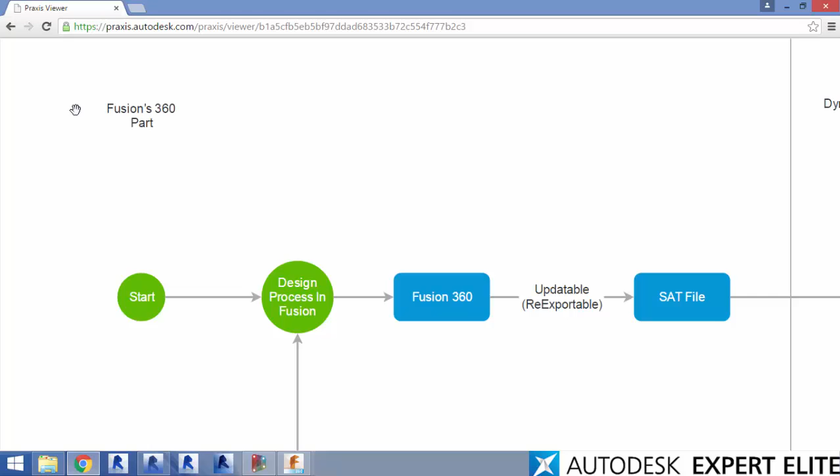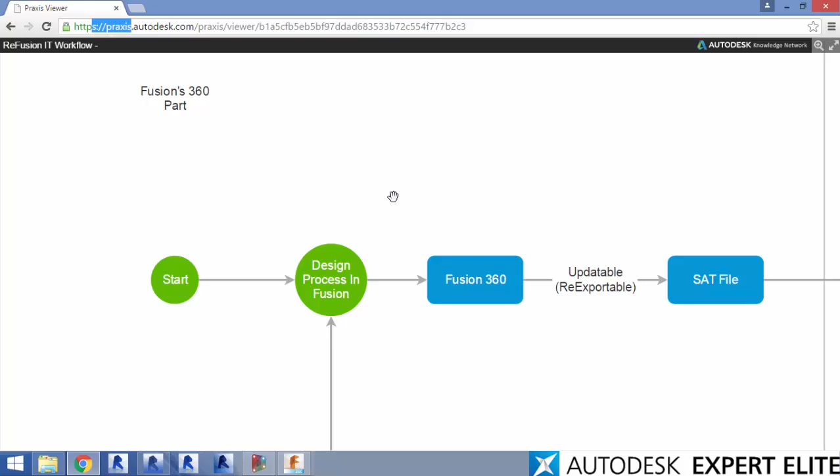Now, let's get started. The workflow is pretty straightforward. It has three parts: Fusion's part, Dynamo's part, and Revit's part. This chart can be seen in the description of this video. It's using Praxis workflow technology by Autodesk, which is still in testing. You can check it out.

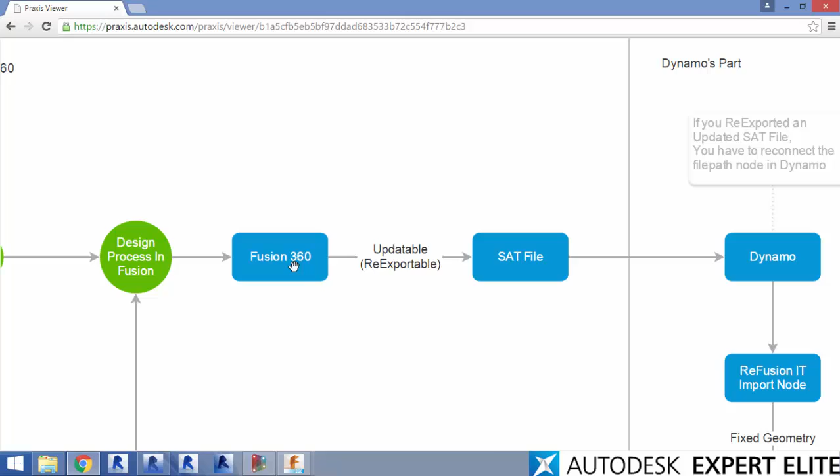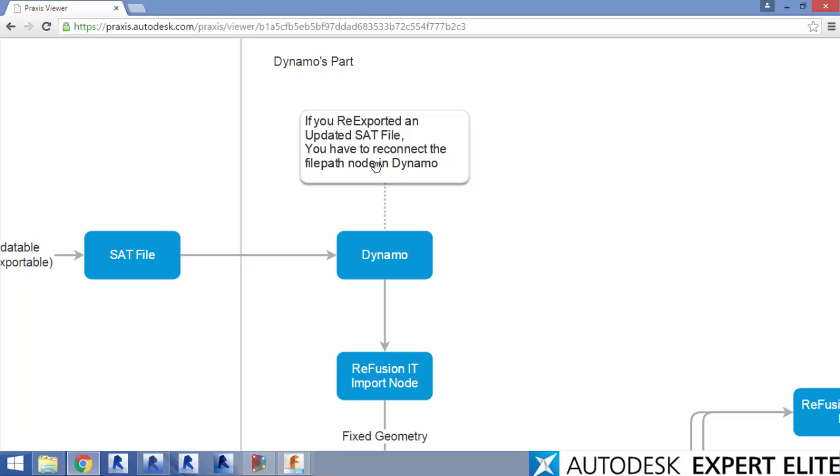The starting point would be the design process, which is happening inside Fusion. Fusion can get me an updatable SAT file, in other words, a re-exportable SAT file. The SAT file gets into Dynamo, where I have placed a little note. If you re-export the updated SAT file, you will have to reconnect the file path node in Dynamo, which I'm going to demonstrate in the video.

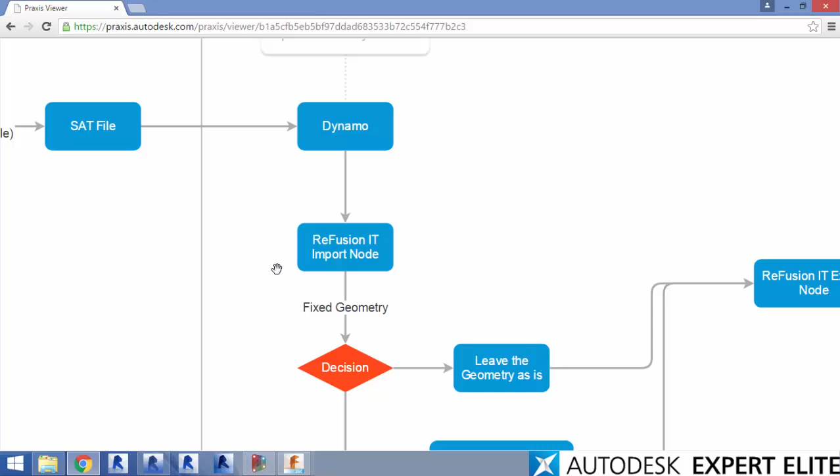Dynamo gets that SAT file into a ReFusion import node, which fixes that SAT file, especially the orientation of the file. After getting a fixed geometry, I will have to decide either leaving that geometry as is or using Dynamo to modify its surface, either dividing it using Voronoi or any other tool.

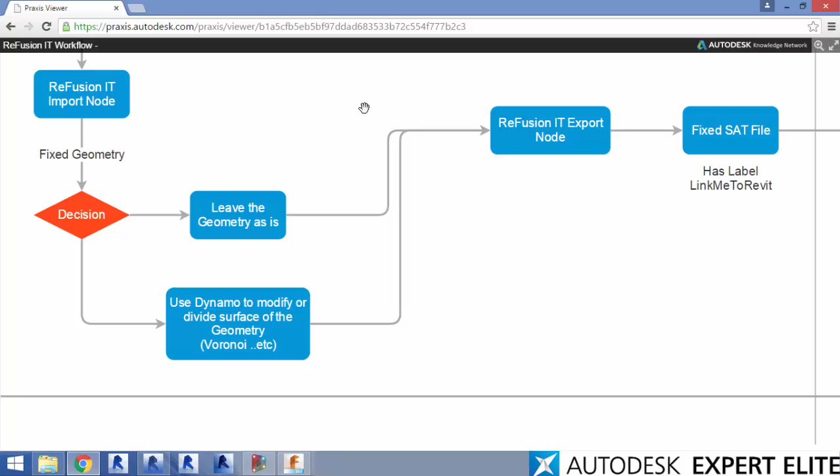Then I get into an export node, and that export node gets me a fixed SAT file which has the label link me to Revit. For example, if my SAT file was named Kuram, then the fixed SAT file would be Kuram link me to Revit. We're gonna see all this in the video.

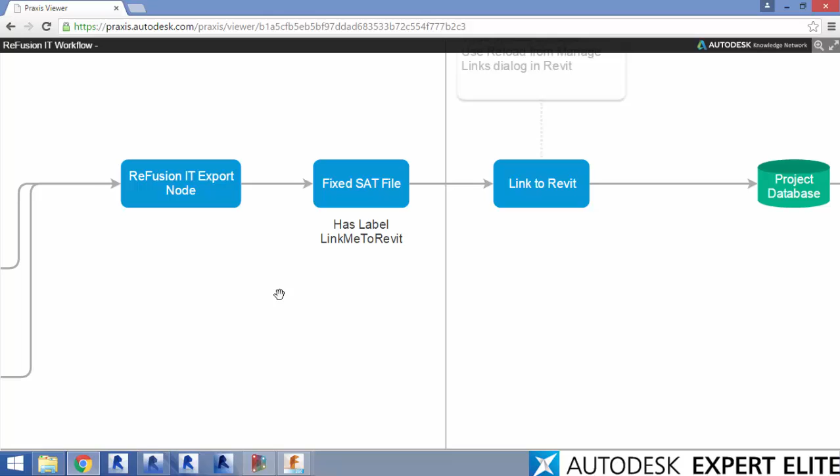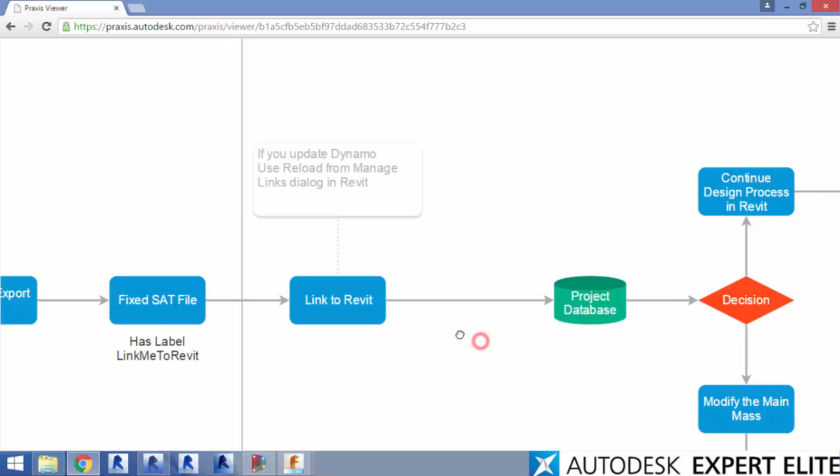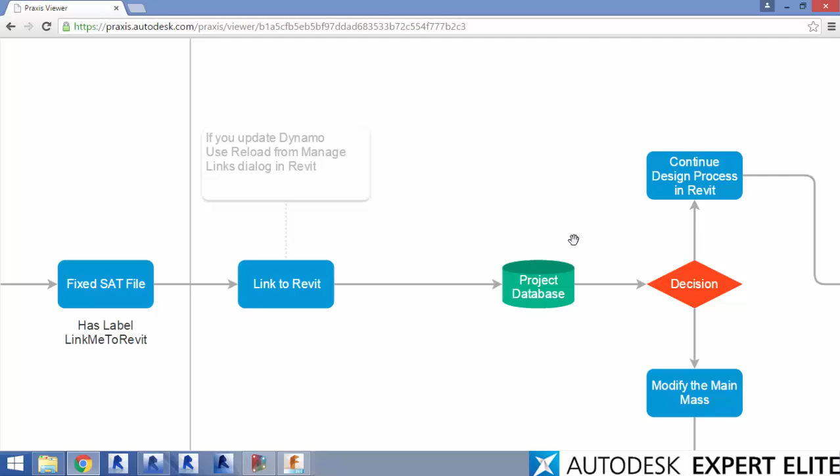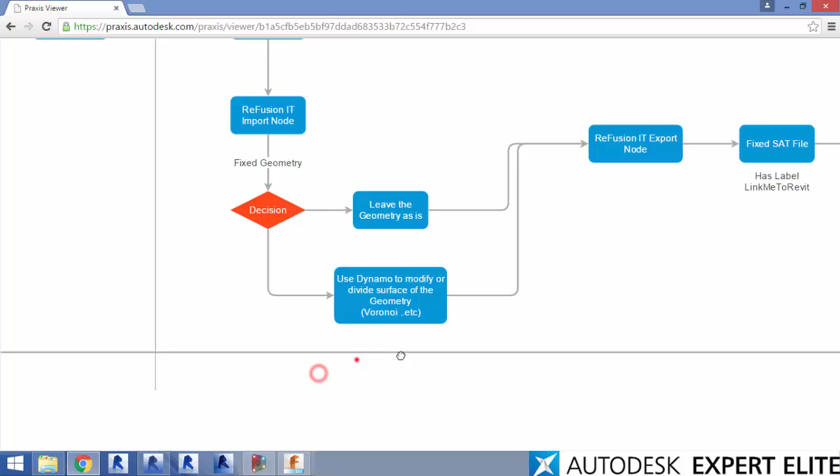The last part would be to get this into Revit, which is linking it into a Revit project. If you updated that Dynamo fixed file, you will have to reload it from the Manage Links dialog in Revit, which we are gonna see. Then I would have to decide whether to continue the design process in Revit or modify the main mass, which will get me back to the first place in the design process, which is pretty easy.

Don't worry, it's not long. I had to make it a little bit long here in order to make you understand it very smoothly. Now we're gonna get into the first part, which is Fusion's part. Here's the Fusion main interface. I'm not gonna get into the details of how to install Fusion, Dynamo, or Revit. They're all available on the web. I'm just gonna explain the workflow, which is connecting those into one piece.

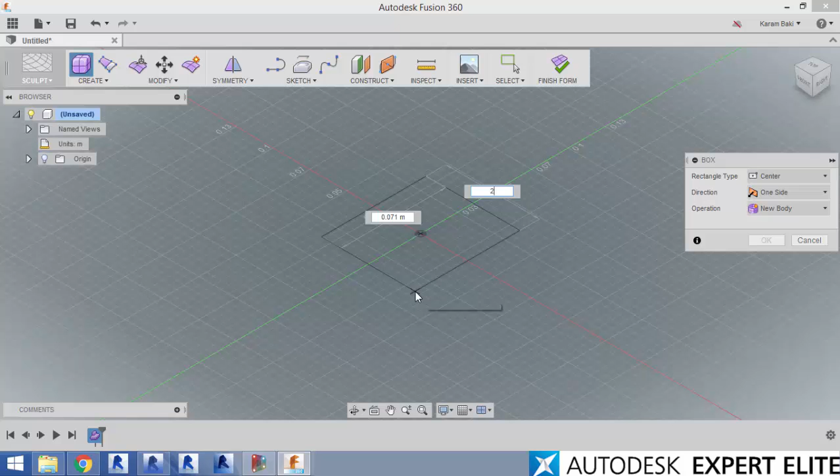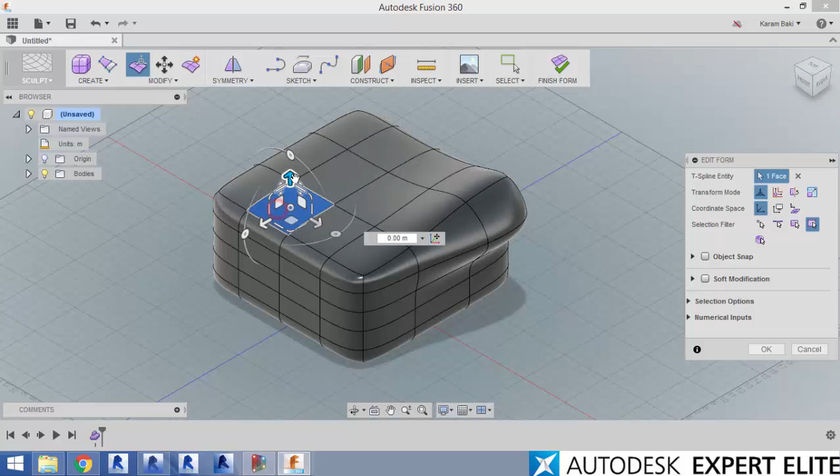For those who have not dealt with Fusion before, I'm going to demonstrate how flexible it is. I've created a quick box which is mirrored and symmetrical in every part. Let me remove the symmetry. Now I'm gonna modify any part I want. I can rotate it, move it up, down, scale it. I can simply do anything I would like to do inside a Fusion project. The possibilities are unlimited and the abilities are huge.

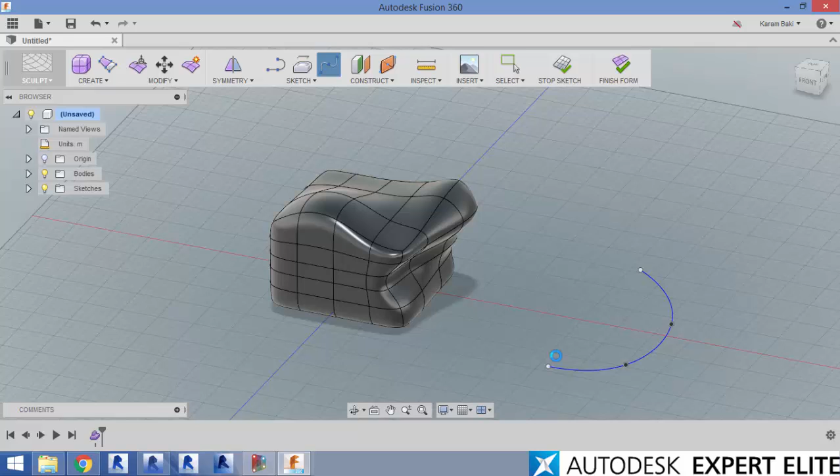Now I'm gonna continue to modify this, just making it a little bit buildable. Now I'm gonna create a sweep, let us say. A sweep is a very well-known form in all programs, but in Fusion it's much greater than in other programs.

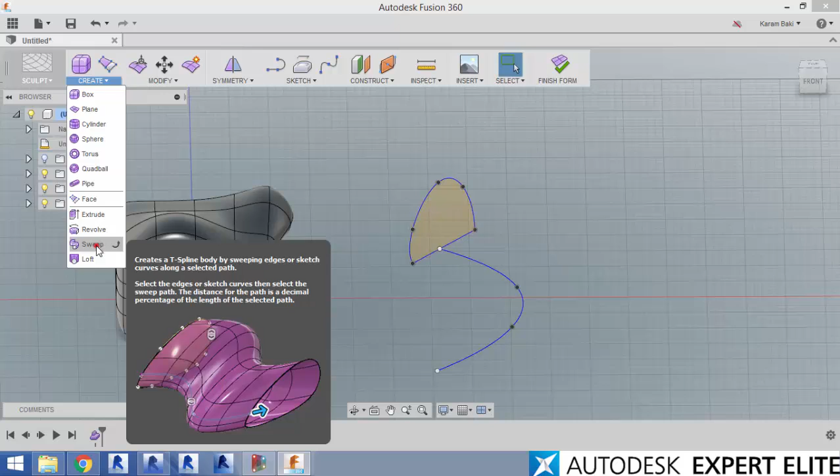Now just a quick splines, which I've made a quick profile in here, and I'm gonna create a quick sweep on this path. Yep, and also this is modifiable in the way I would like it to be modified.

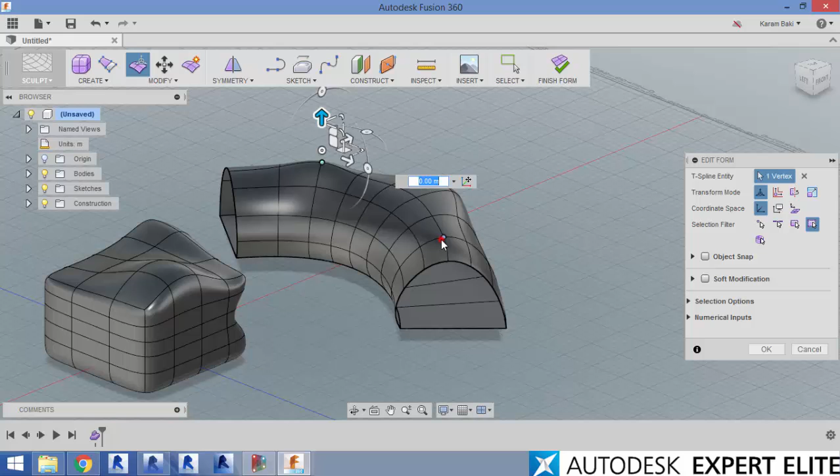It's pretty easy to use, pretty straightforward. It does not need a lot of proficiency. Now filling the holes is also a great feature, just like that.

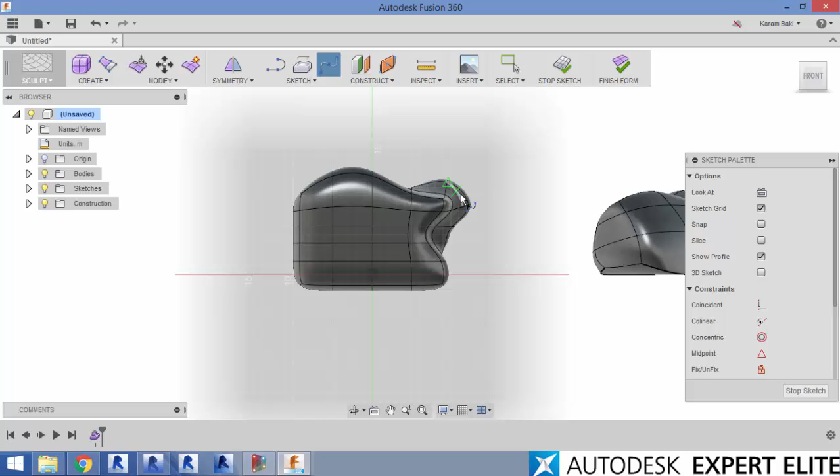Now another great feature would be the bridge connection, which is I'm gonna make a connection from this into this, let us say. Oh, sorry, what was that? I don't want it to be closed.

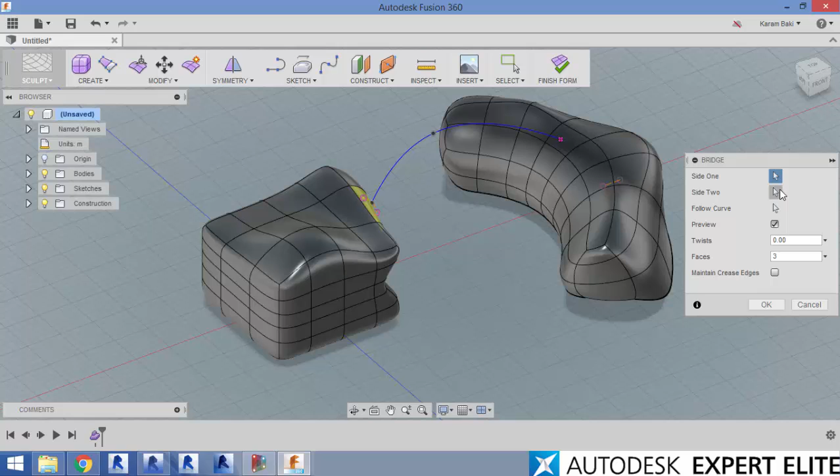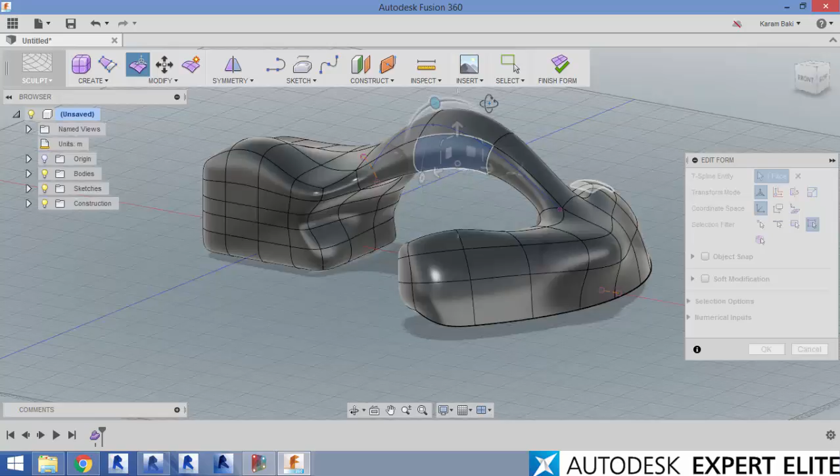Now I'm gonna create a bridge in between this and on that curve. Now check out this great ability. We just connected everything together, and also this is customizable the way you would like it to be customized. That it's all smooth, it's all great, it's all quick flash of ideas that can come inside your head.

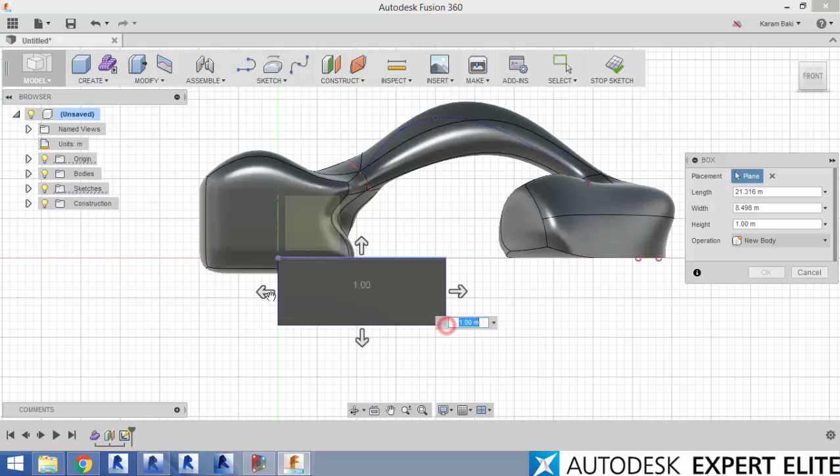Now I would do a last move, which is finishing the form and then creating a quick void, which is gonna be in this place. I'm gonna cut out this part and finish it up.

Now this form has not taken from me 1 or 1.5 minutes. Now how to get this form into Revit and continuing the design process in Revit was the main challenge.

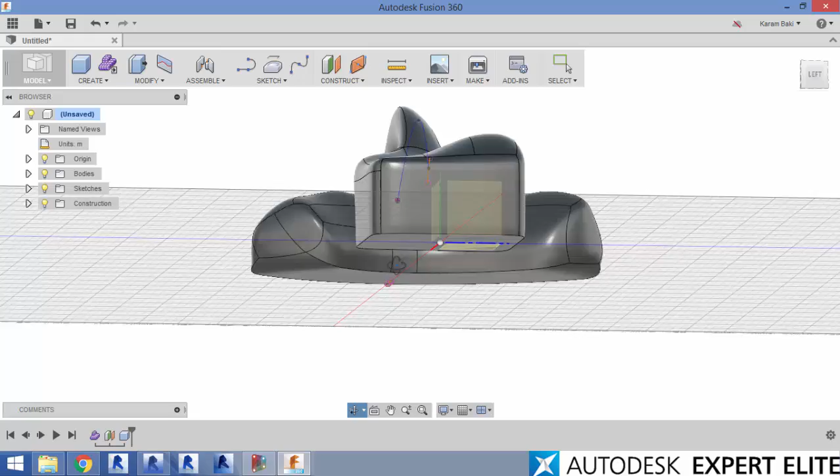The final thing I would like to show you in Fusion before getting it into the next part is that I can get back into time and edit the form the way I would need to, or even more manipulate and make it more advanced, make it more like smoothly fluid and whatsoever.

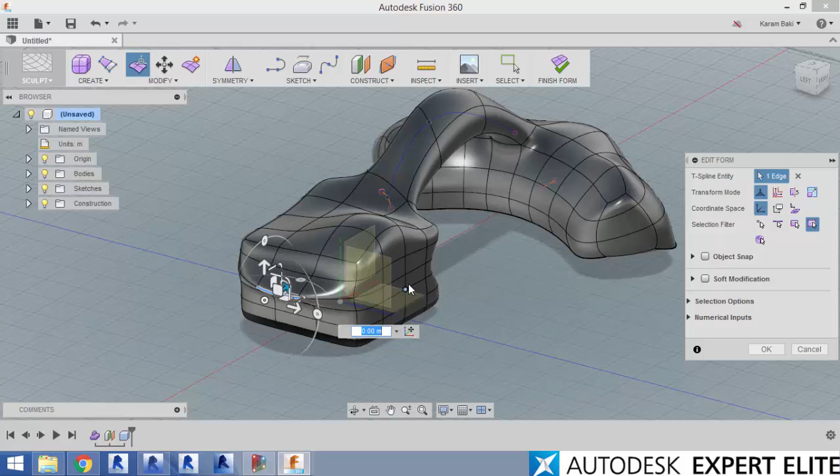Now this is a very quick form. I know it's an ugly one, however it's just for the demonstration, and okay, finishing it, it also recutting itself and fixing itself again. Now I can of course save the project to open it again as a Fusion project.

But now let's get into the next part, which is getting it into Dynamo. Now, I'm gonna go to File, Export, and I'm gonna create a new folder called Test ReFusion.

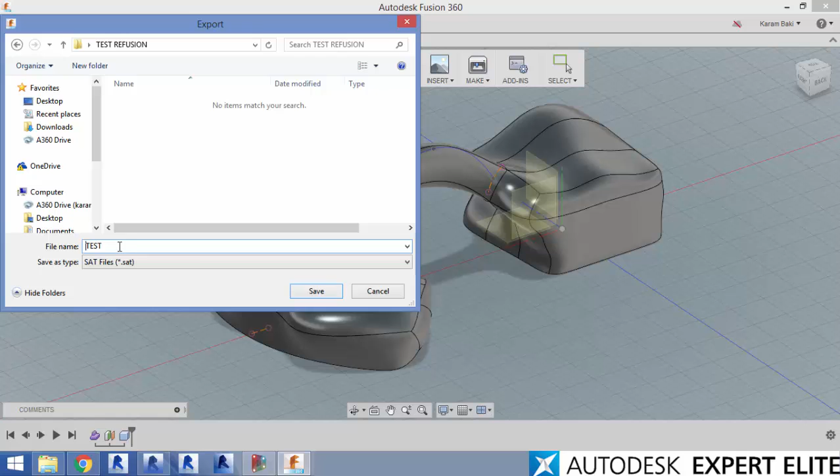Now this is my project, let us call it project test.sat, or just let it test.sat. Okay. Now I'm gonna go to the Explorer. I can see a test.sat file.

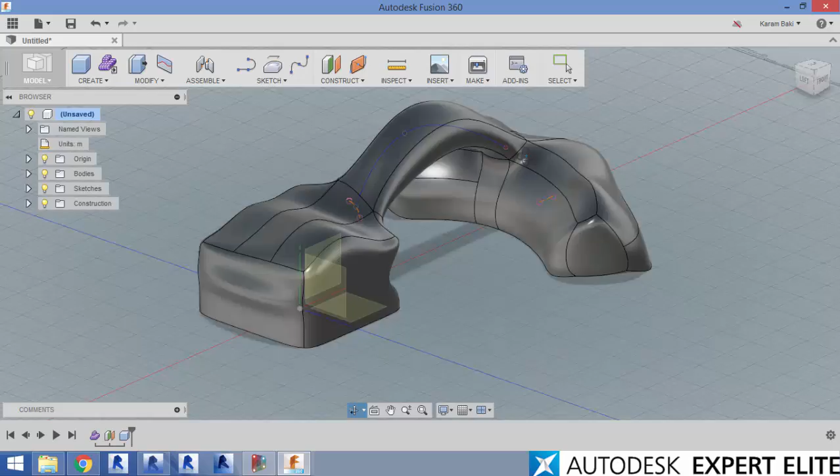Now I'm done with Fusion, and if I needed to even more manipulate the form, I can simply re-export it as many times as I want, but now let's get it to the next part.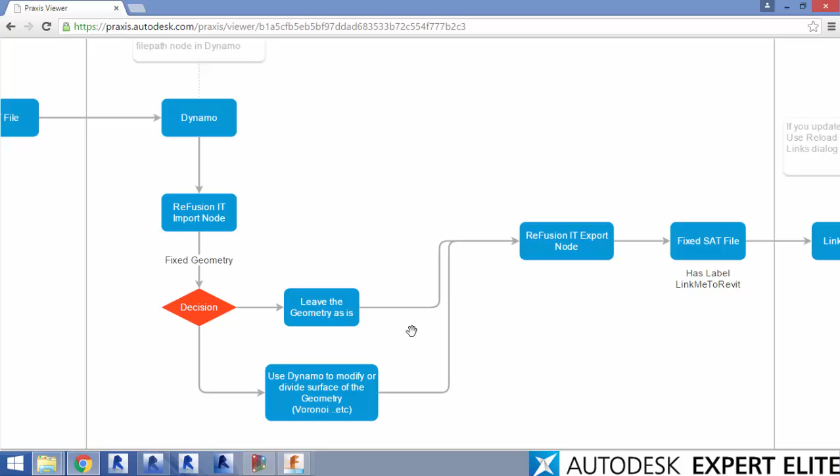IT import node, which then I will get the fixed geometry, and then I will decide what to do, then getting it into an export node, which will give me a fixed SAT. Now, how to do that?

First thing you have to do is to download those nodes from the description of the video. Now, in Dynamo, you will have to open a new project. Now, those are the custom nodes.

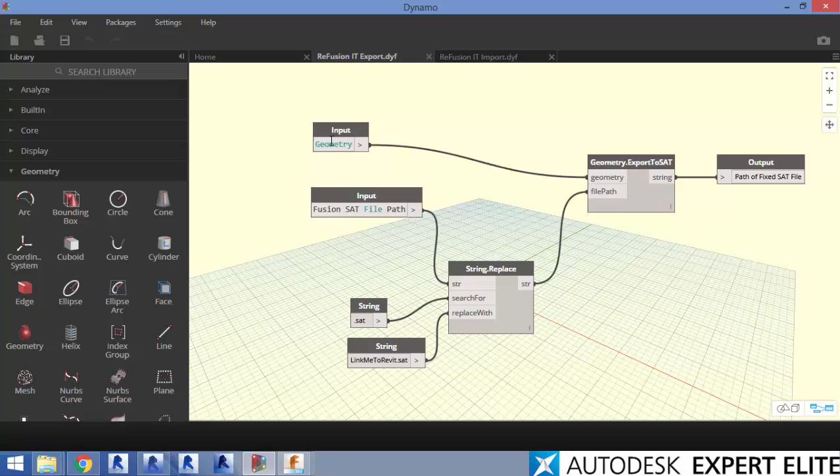You can open them and investigate them. They are pretty simple and straightforward. I just have that file path, then it will get the geometry and fix the orientation, and it will give me the geometry fixed up, and the export one will just get that geometry and get that file, same path, then replace the strings to get it this label.

Now you don't have to have knowledge in Dynamo to use this workflow. It's already automated. Now in this place I'm gonna start by file path, which will tell Fusion that this is my file test.sat, which I've saved inside test ReFusion, and then I'm gonna use those nodes ReFusion IT export and ReFusion IT import.

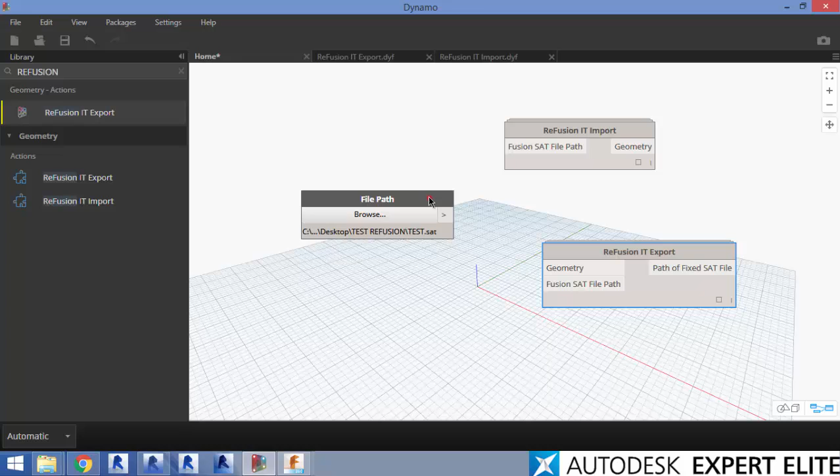Now I'm gonna connect those nodes all together. As the chart says here, the first step would be connecting it to the ReFusion IT import node, which is connecting it in here, and it will give me the geometry. Now it says here, Fusion SAT file path. It's the same file, it's just for the exporting purposes.

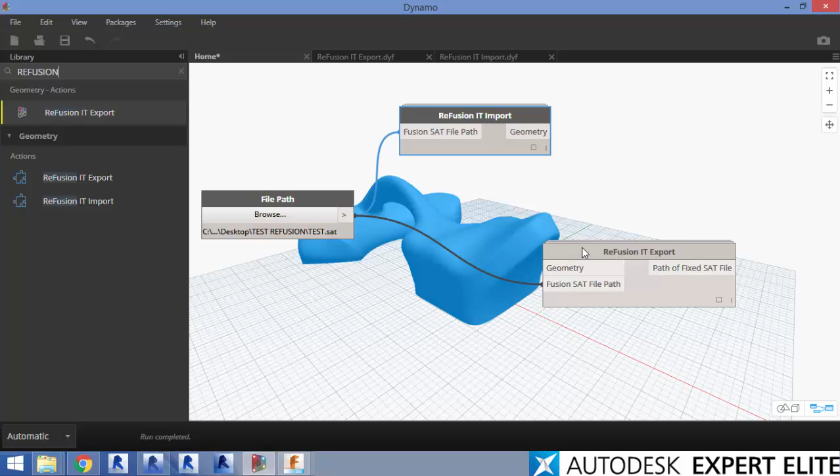Now I would have to decide here, either leaving the geometry as is or using Dynamo to divide the surface using Voronoi and other tools. That would be simply using this node if I need to modify any further, but for now I'm gonna decide to leave it as is.

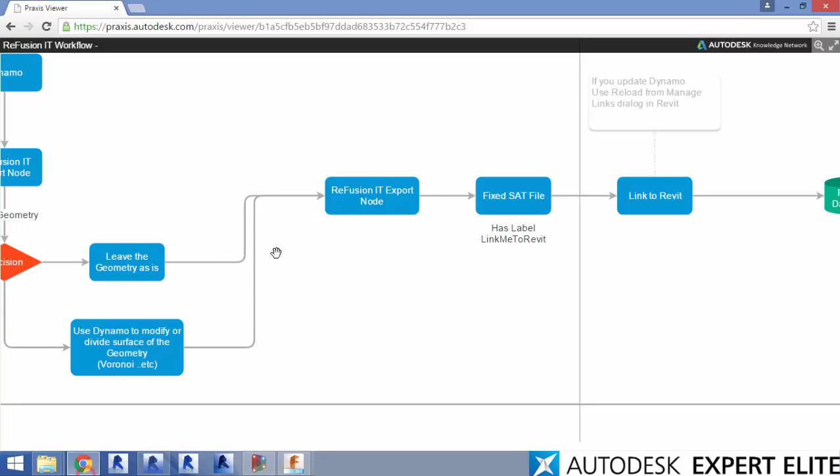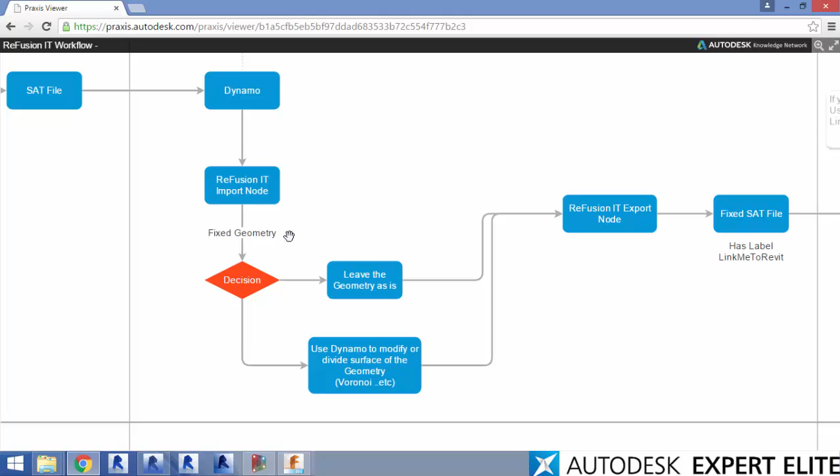So I'm just gonna reconnect or directly connect this geometry into the ReFusion IT export node. So I have decided to just take this path: Dynamo, ReFusion IT import, got me the fixed geometry, and I decided to leave it as is, and I've connected it to the ReFusion IT export node, which is supposed to get me this fixed SAT file.

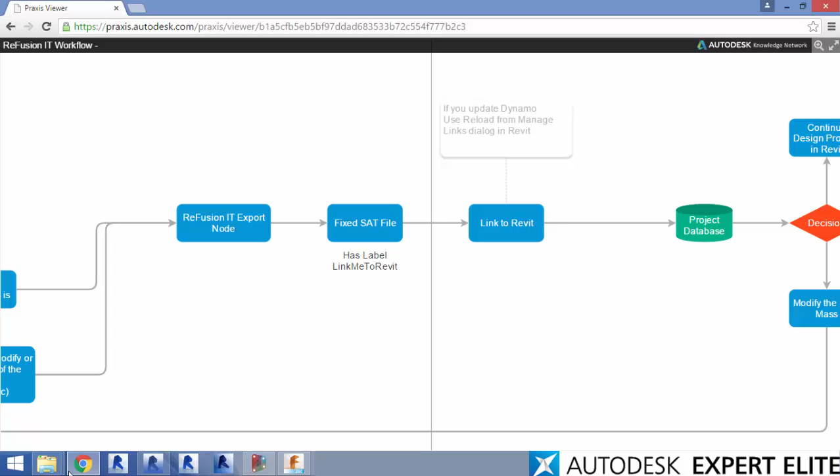If I go into Windows Explorer and go into here, I would get this file which has the label 'link me to Revit'. This file was automatically generated by Dynamo because I have this set to automatic. If you have it set to manual, then you will have to make it run. So in that chart I have that fixed SAT file. Now the part of Dynamo is finished.

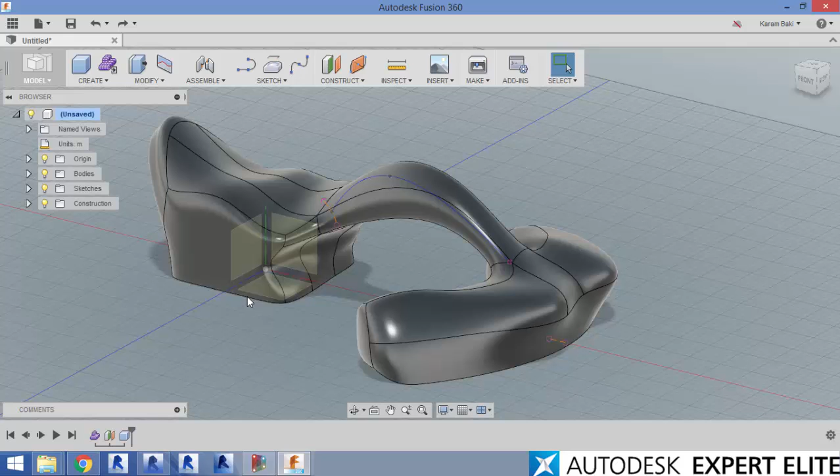If I decide that I need any more modifications, let's do a quick one, which is getting back into Fusion, and let me make a noticeable modification. I'm gonna edit it, and let's say delete all this, and I'm gonna fill up that hole and finish up the form.

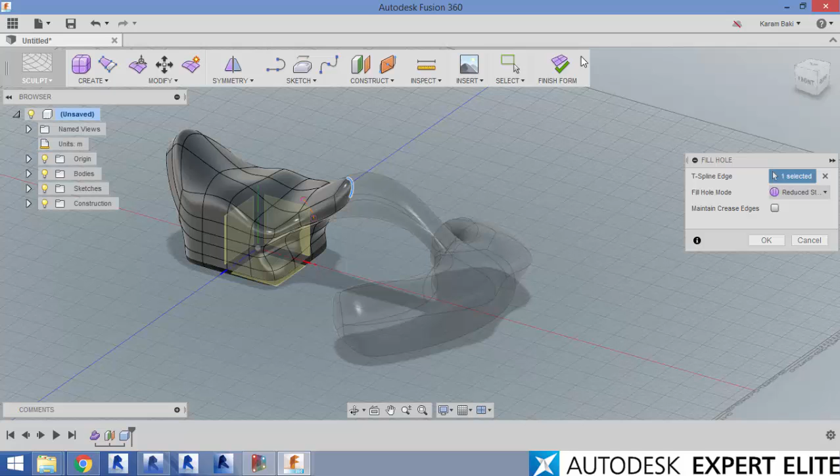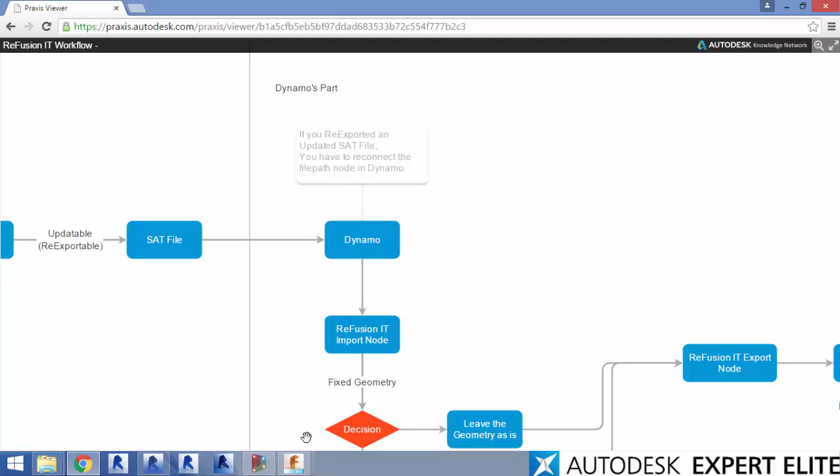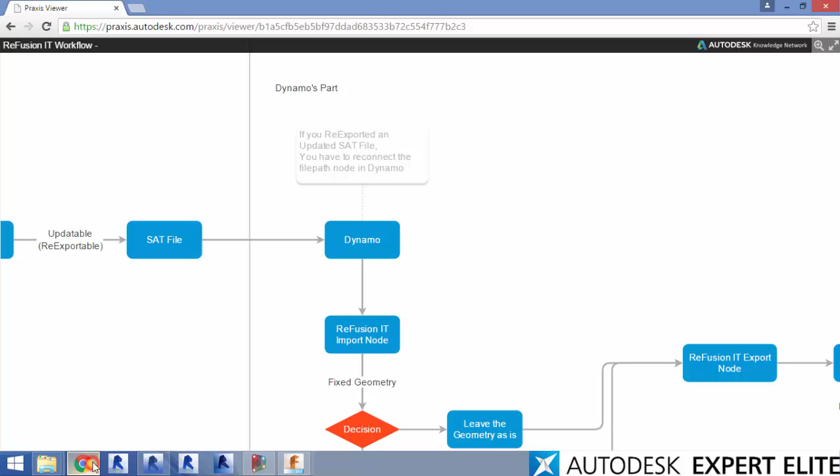Now in that chart I'm saying that if you re-export an updated SAT file, which I'm gonna do now, I have re-exported the same SAT file with the same name, test.sat. Yes, replace it. You have to reconnect the file path node in Dynamo. Then I would go to Dynamo and simply reconnect this by double clicking it, and it will get me the updated form.

Now this part is finished. I will make a quick summary before we go to the last part.

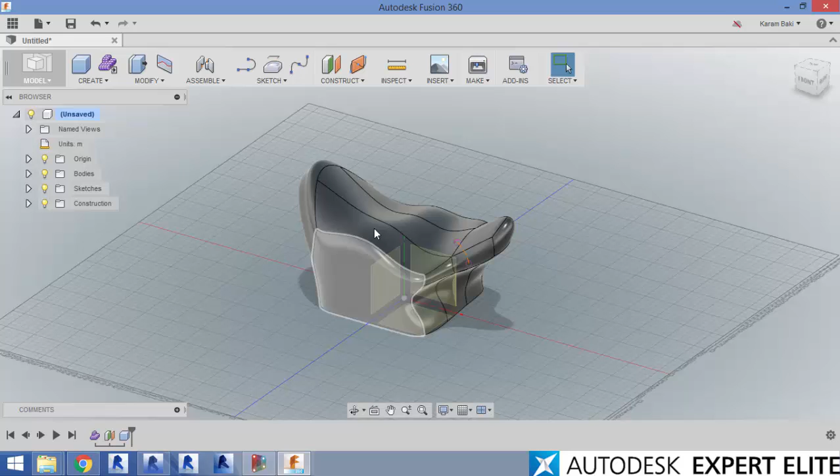We started with the Fusion project, and then we exported a SAT file, went into Dynamo, made a file path node, a ReFusion IT import node, a ReFusion IT export node. Then I told Fusion that this is my project. It's connected, and then I connected it to the Fusion SAT file path, and I decided to leave the geometry as is.

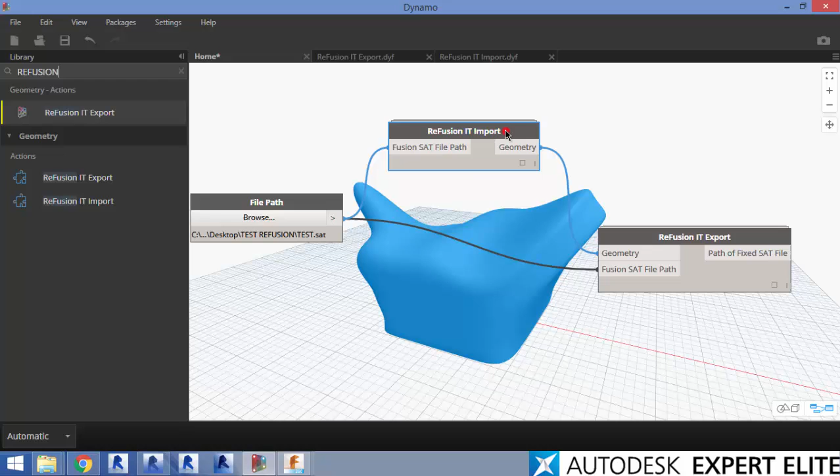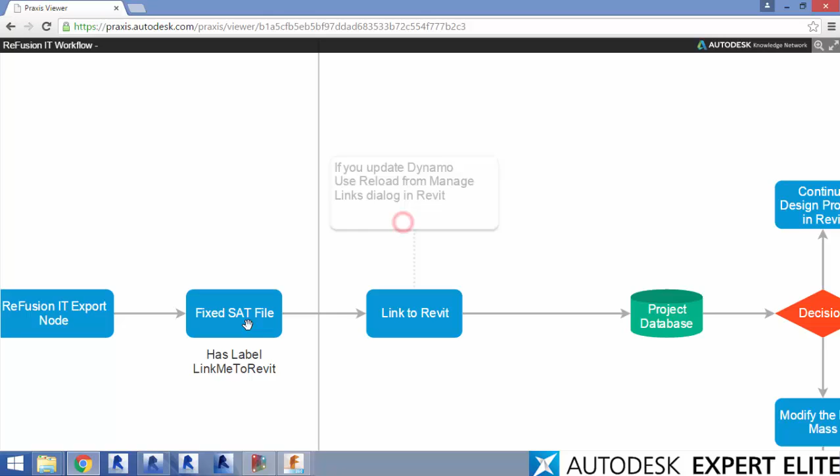Then I connected this geometry with the export, so the geometry as is gets exported into that file, which is called the same name as that file but has the label 'link me to Revit', as this chart shows here. Now the next part would be in Revit.

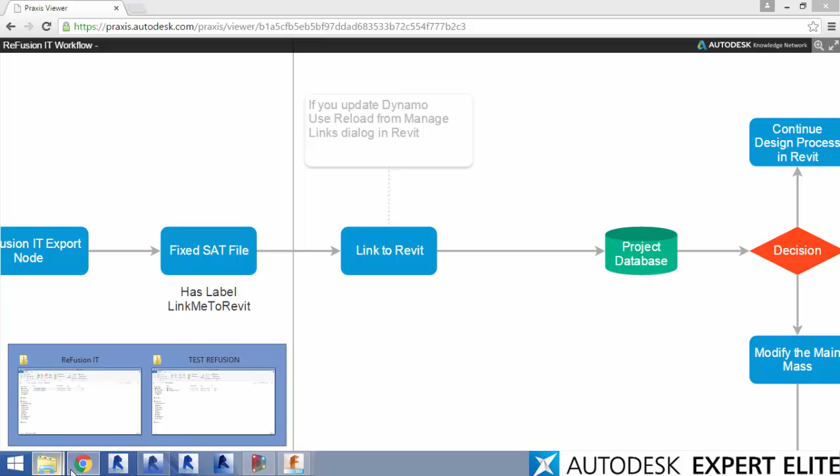Now, after finishing up with Dynamo's part, I got that fixed SAT file, which is in here: test, link me to Revit. Now, the last part of the workflow is linking that fixed SAT file into Revit and seeing the abilities I can do inside a Revit form.

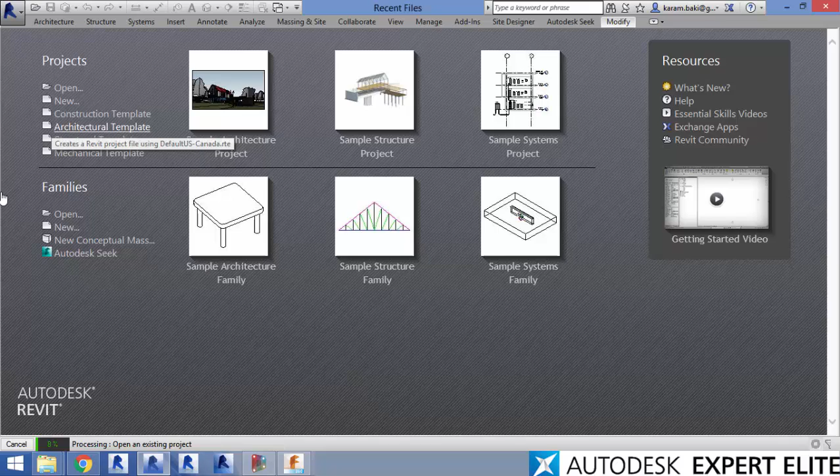Now, going into the Revit architectural template, I'm gonna go to massing and site, in-place mass. Please notice that you will have to do that inside an in-place mass, it's not directly linking it. It cannot be useful if it's directly linked. Inside the massing and site, in-place mass.

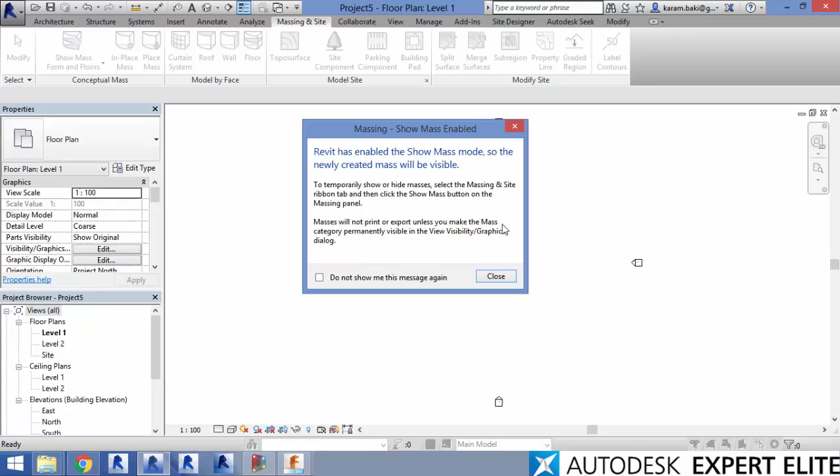Okay, now inside in-place mass, I'm gonna link that CAD. Make sure you have SAT, not DWG, it's SAT files. Link me to Revit, open. Now this file gets linked into Revit.

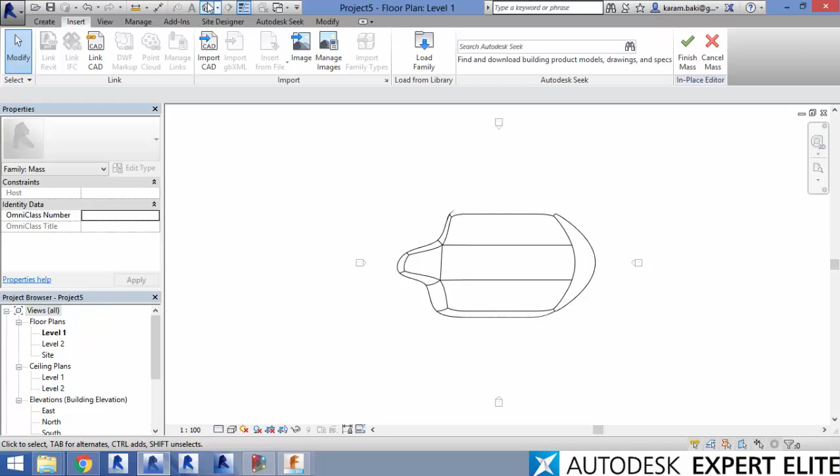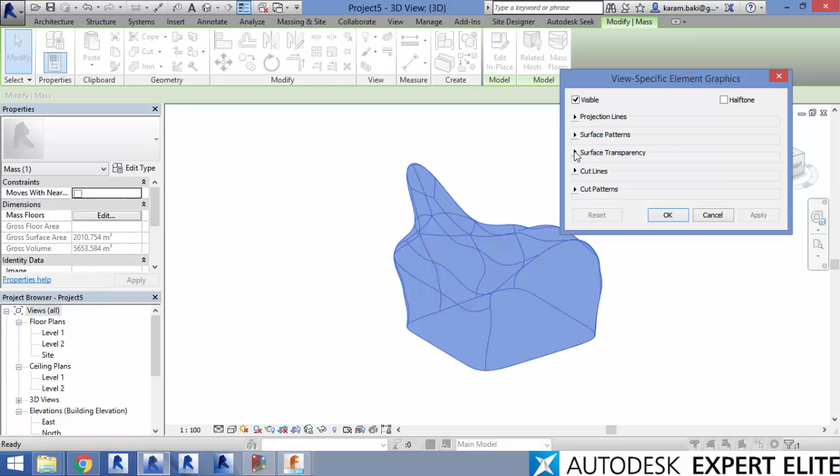Now what are the abilities that can be done when using this file? I can simply do wall by face, a curtain system, and the most amazing thing is using mass floors. Now before I use mass floors, let me override this by element and give it a bit of transparency on the surface. Now let me see, in the elevation I have level 1, 2, let me add level 3 at 4,000, sorry.

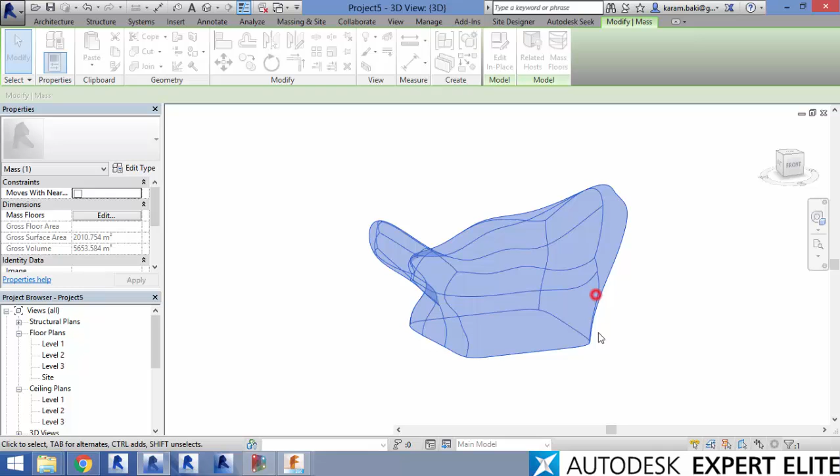Now mass floors 1 to 3, I have those 3 mass floors in their correct shape.

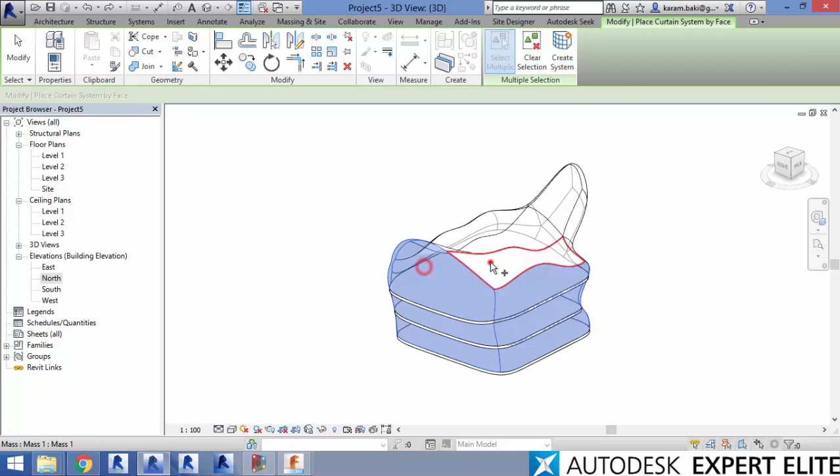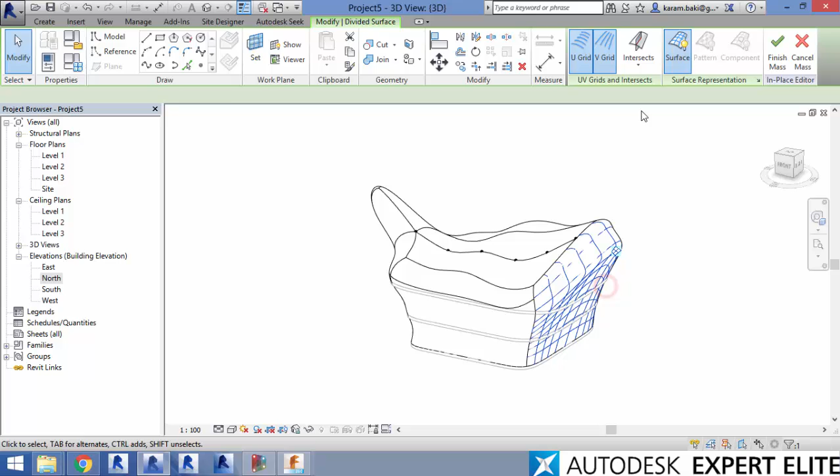I can now simply mass floor, and I can simply wall by face everything, I can simply curtain system everything up, and the most amazing feature is that I can edit in place, tab into any face dividing its surface, tab into any edge dividing its path, and the nodes work out as expected. The faces, the divided surface will work out as expected, using any shape I would like to.

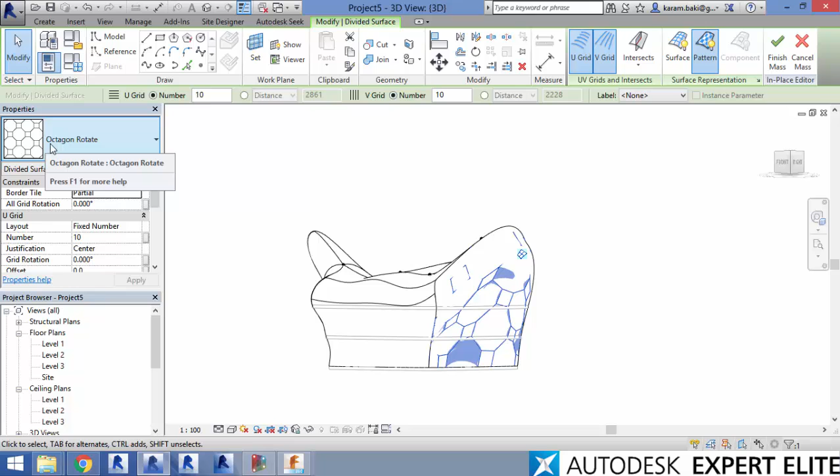However, the only thing you will have to consider is that you will have to hide the mass when you're done. Let's make a quick example for, let us say, octagon rotate. Finish the mass before you go out.

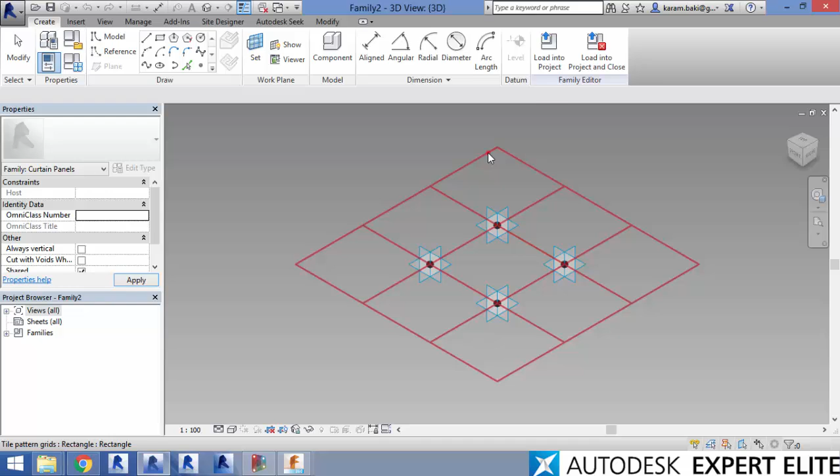Now let's make this quick test. I'm gonna go to new, family, curtain panel, pattern based. Let us change it into octagon rotate. Now let me create something very quick, something like this. It's just a straightforward sweep.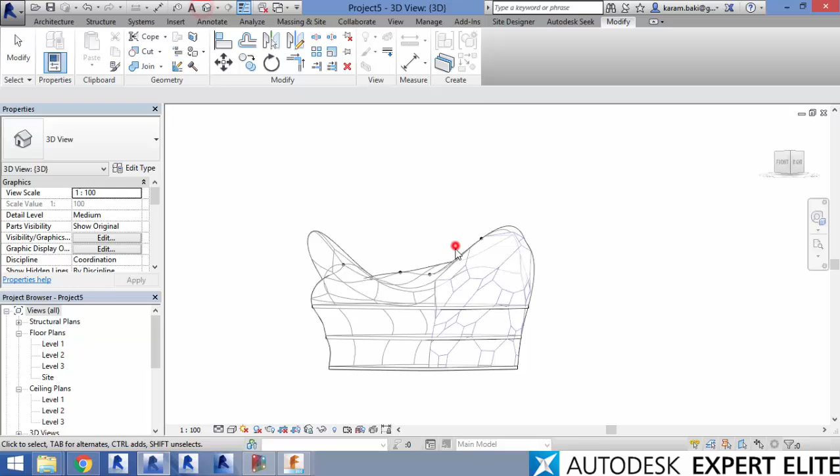And let's load it back. Then edit in place. I'm gonna click on this and then change it to family 2. This is all Revit techniques. It has nothing to do with the workflow.

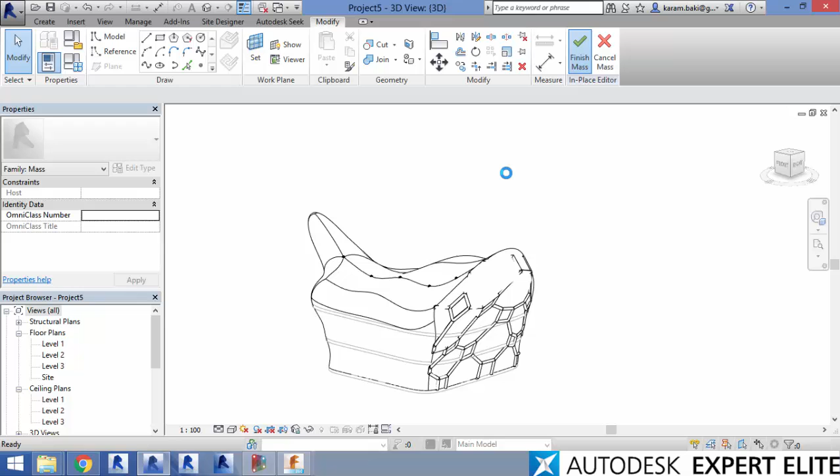Now I have this surface on this. I will finish the mass. I still have the mass. Now the workflow simply works when you are finished from the mass. You just simply hide it.

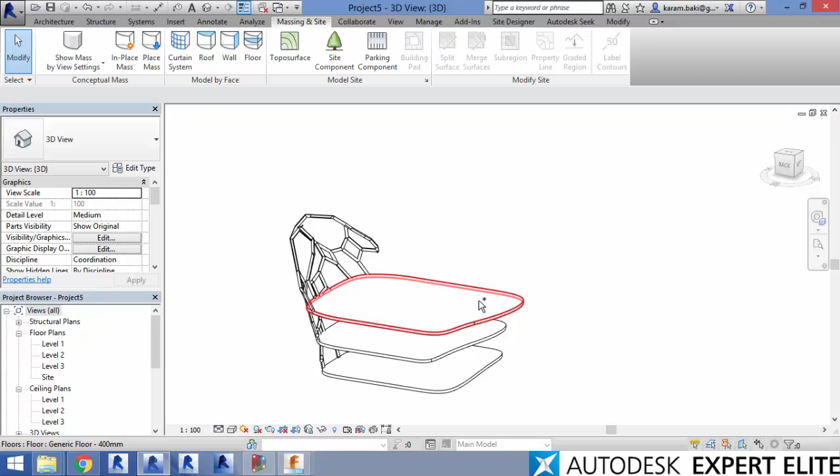It is already in the VG. Hide the mass. You will have everything that's built on, including surfaces, paths, walls, or anything else. I have not built anything but the floors and that surface.

Now, that's not the most amazing thing. The most amazing thing when it comes to updating this mass, you're gonna be amazed how Revit behaves in this case. Now, in the chart, I'll have to decide after linking that form into Revit whether to continue the design process or whether to modify the main mass.

Let me decide that I will need to modify and I don't need to continue the design process now. Then I will get back to Fusion. I will open my Fusion.

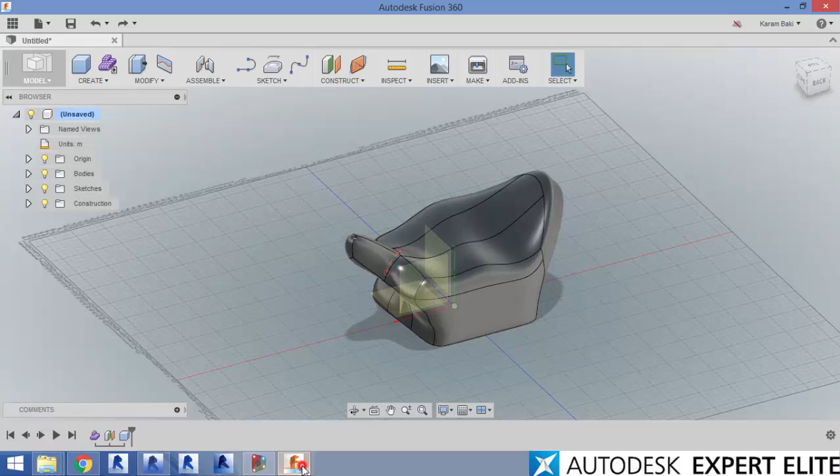Now I will edit this form. Let's make a quick edit in that place where I had that form or that surface created. Let's make it something like that. And okay, finish the form.

Now in the chart again, I told you that if you have a re-exported SAT, which is going to be re-exported, you will have to reconnect the Dynamo, which is going to happen again.

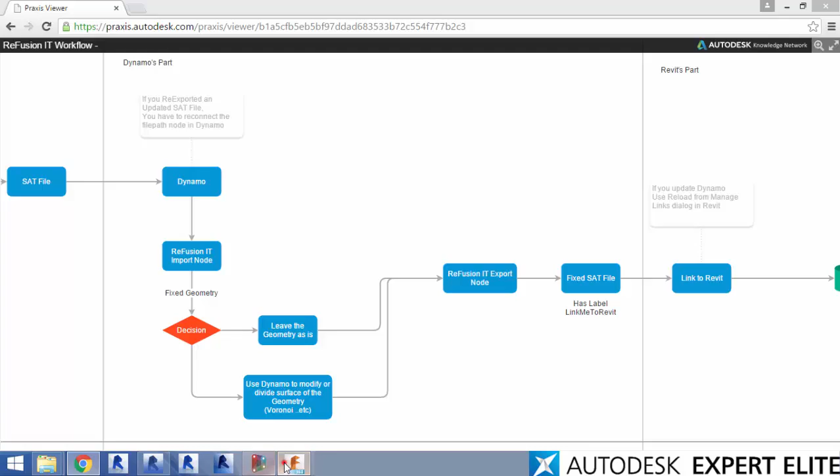Now I'm going to go to Fusion. It's offline. Export. Sat. Same test.sat. Okay. Now in Dynamo, as the chart says, you will have to reconnect the filepath node.

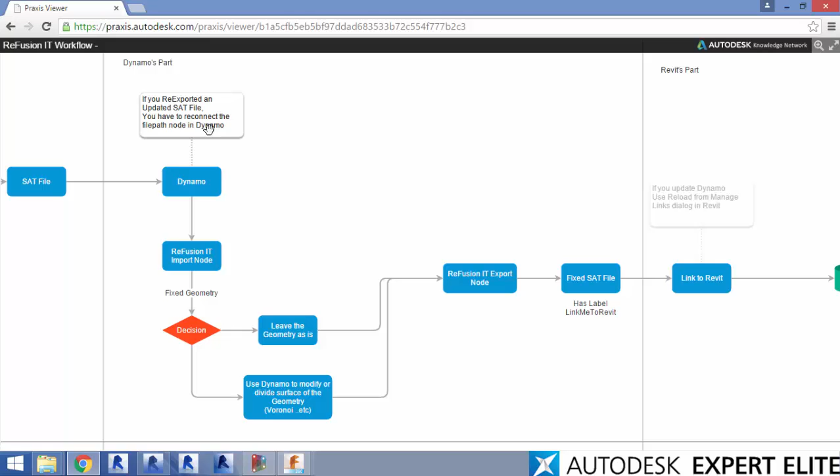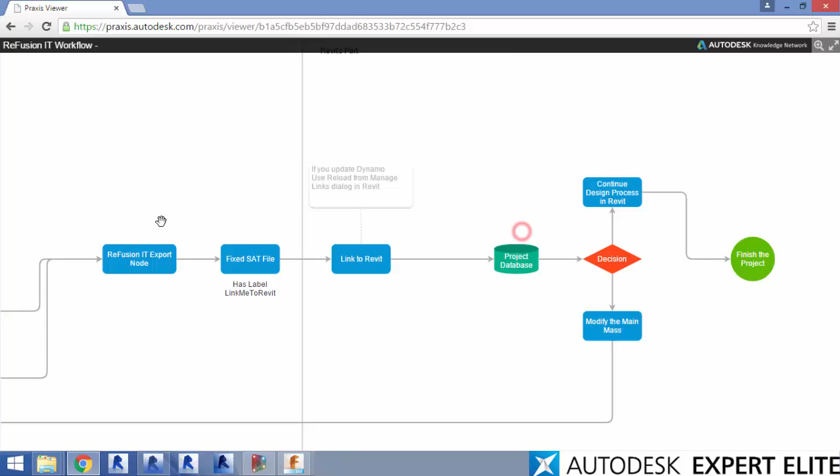Reconnected it. It gave me that form updated. Now in the chart I say, if you updated the Dynamo, which I've done right now, I will have to reload the linked file from Manage Links dialog in Revit.

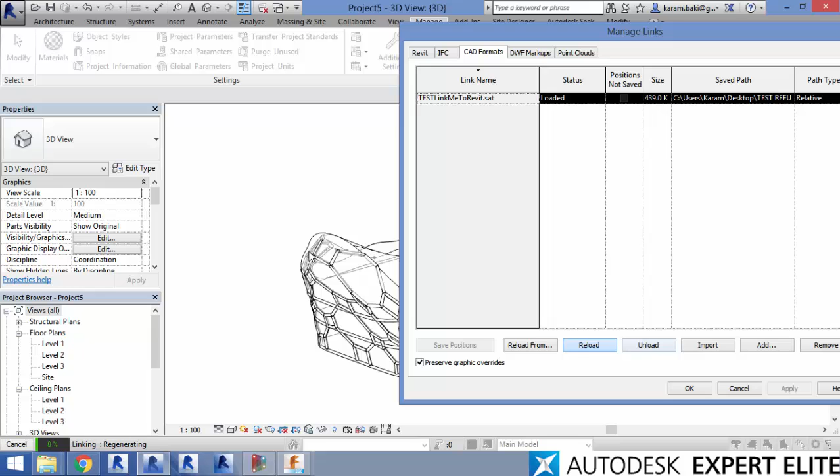In Revit, Manage Links, CAD, and reloading this will get me an updated mass, an updated data, and the most amazing thing, it updates the form inside Revit. As you can see, it was like that.

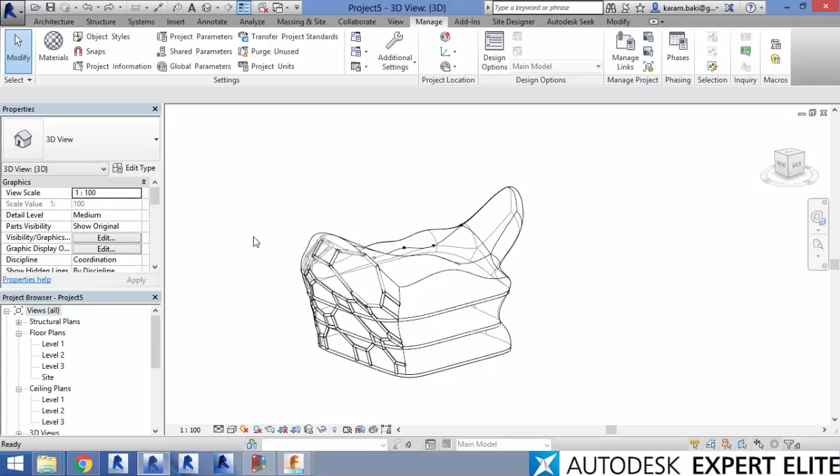It came into that. As you can see, the file simply gets updated. That's a Control-Z and a Control-Y to let you see the changes.

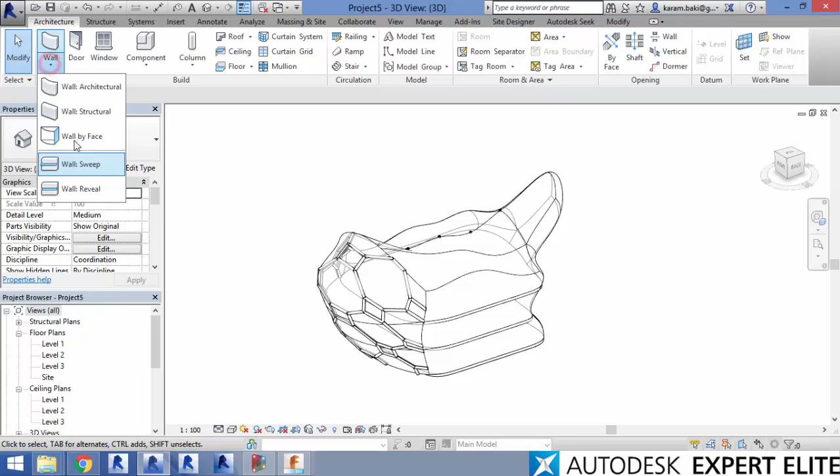Now that's the workflow I'm talking about. Now imagine using this ability to create any organic form. There are unlimited possibilities, especially in the fluid forms, to use. And as long as Revit can create floors, can create walls, and can do curtain systems, the possibilities are simply unlimited.